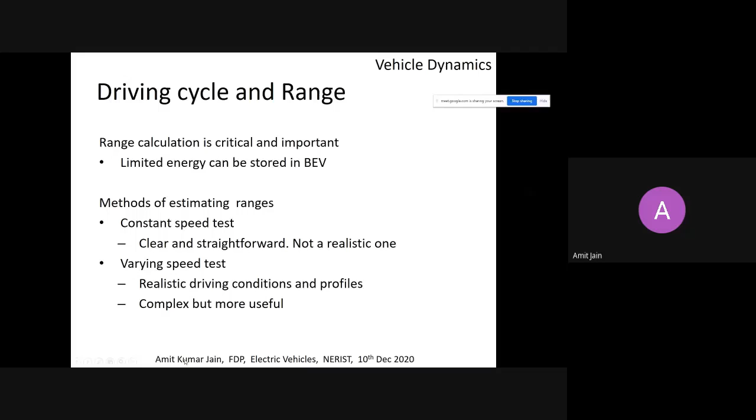Okay, I think there's a lot of noise. I will just come back. Okay, okay, sir. Sorry, all of you. Yeah, it's okay. No problem.

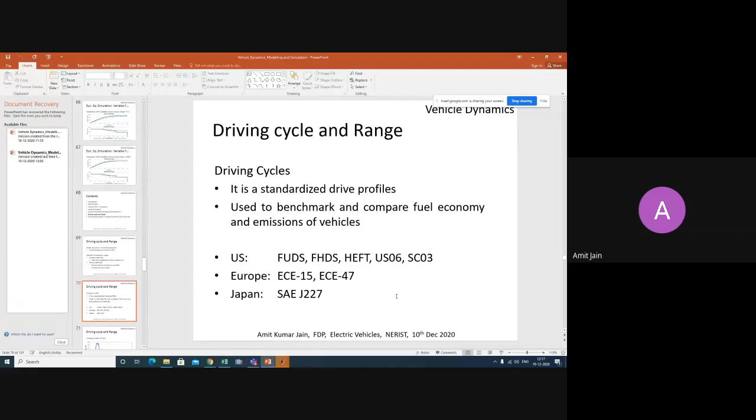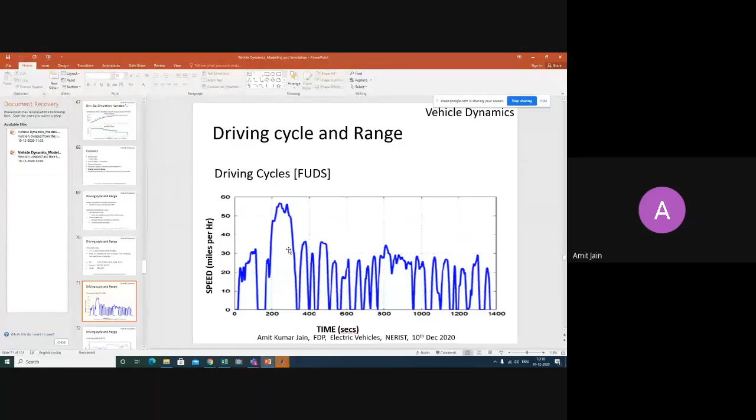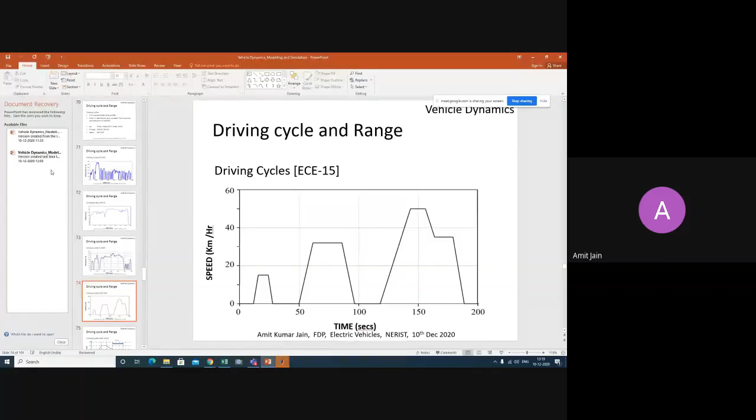This is the European ECE-15. You can see that there is a positive dv/dt, constant speed, negative dv/dt, and these are different. Here it is higher, and these constant speeds are also higher. They might have some kind of data collection, and based on these different dv/dt and different constant speed regions, they can find out what the fuel economy is. This is a nice thing actually. Even during stop and go, we sometimes go to higher torque and higher speed ranges, as we have seen here.

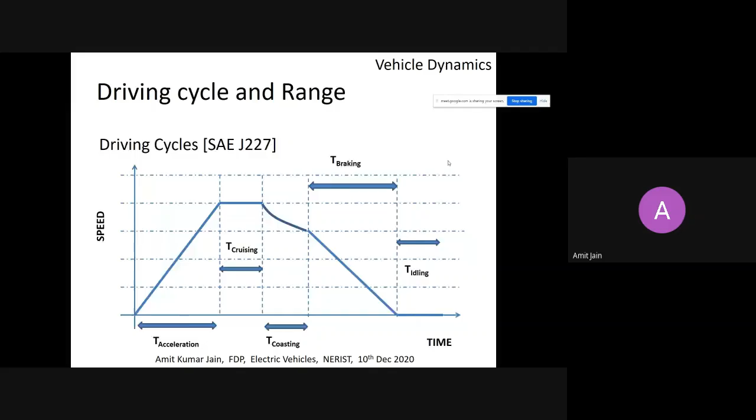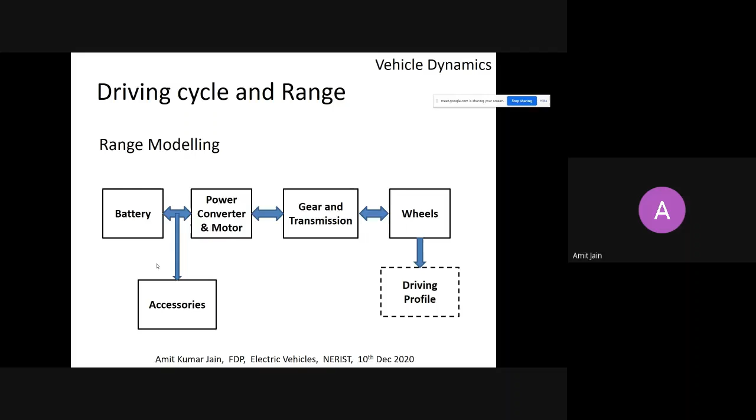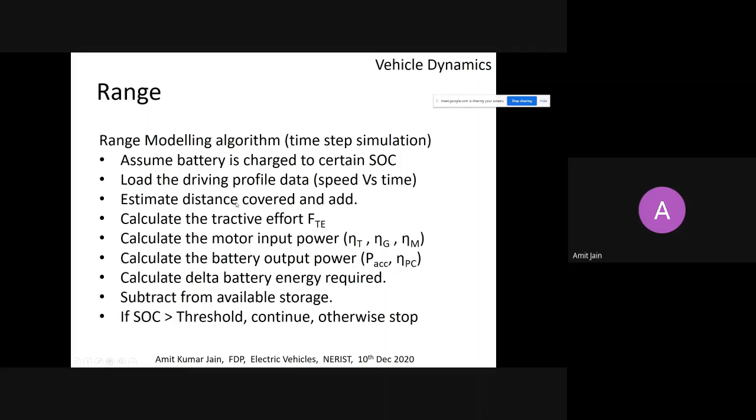So for the driving profile, we will keep running and keep calculating the energy coming out of the battery or going into the battery. When the state of charge of the battery is above the threshold, you continue this. Otherwise, you have to stop, and whatever distance you have moved, that is your range. So this is how it is done.

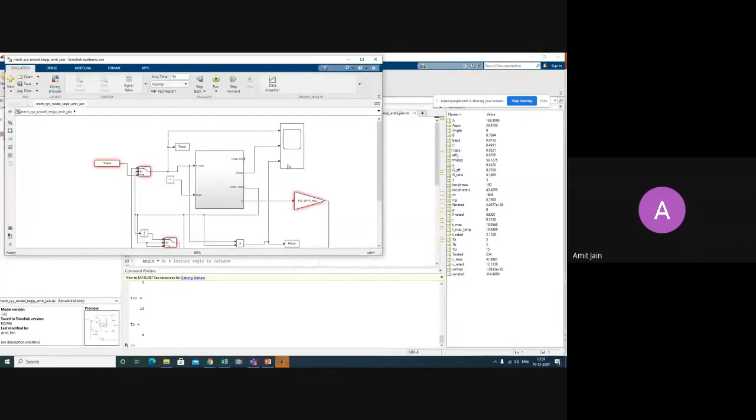So how to put this all in simulation? We have already discussed part of it. Simulink is another platform where we can do a lot of things. Earlier we have seen the M-file approach, but we can also do it in Simulink. A lot of us are quite familiar with Simulink, and it's another way of doing things. It's not command window type.

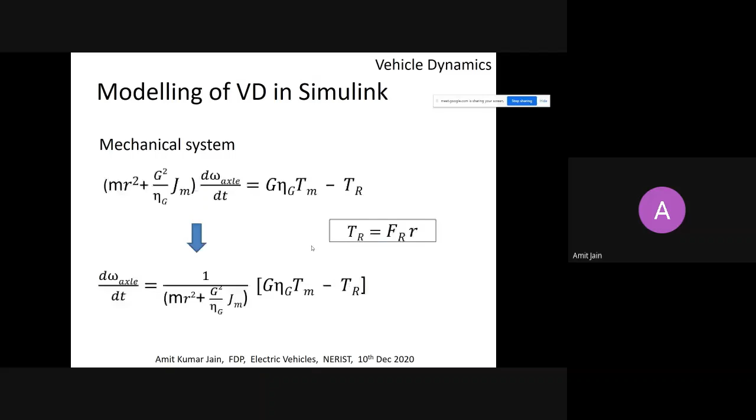And sometimes it's more handy, because if you do big simulations, I'm more comfortable with Simulink, because Simulink has a lot of other machines, power converters, battery models, so they all can be coupled. So if you do this modeling also in Simulink, it will be very handy. We all know this equation. We have to write this equation always in d/dt form, and then in integration form. So this is motor torque, T axle.

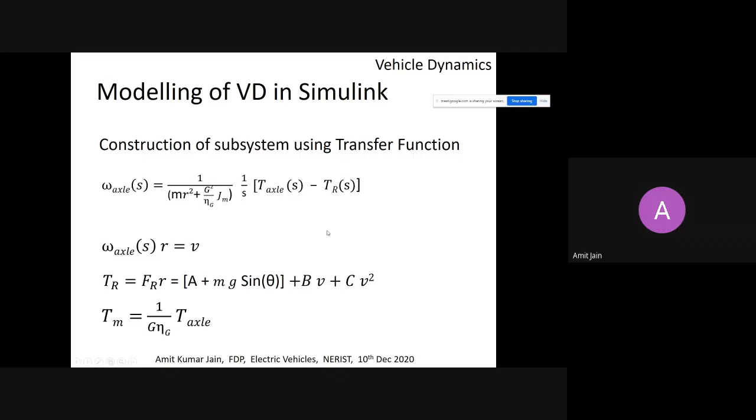We have to write it in terms of Laplace, the s transform. This is easy, the same thing. So this is how to construct this. This is the motor torque given to the block, and let's say you have some system. It has a motoring torque and an opposing torque, and then this is the accelerating torque.

This is the motor torque and this is the opposing torque. The difference of them is the available torque for accelerating. This acceleration torque will give you a certain speed, and this speed is again used for calculating the opposing torques. You can also give the angle, depending on whether you're moving on a slope or not. If theta is 0, the gradient force mg sin theta will be 0, otherwise it is not.

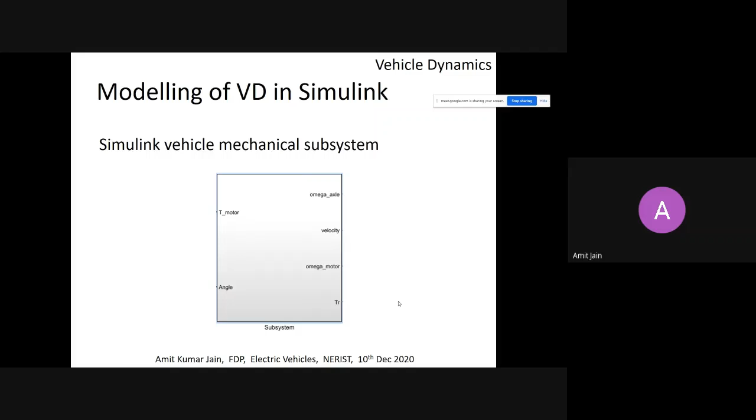So with this, you can make a subsystem where these are the input parameters, and you can even do the performance analysis we have seen. In this block we can also incorporate the constant torque, constant power, and constant speed regions. In the constant torque region, T is constant. In the constant power region, T is inversely proportional to speed. And in the constant speed region, we apply torque that is enough to support the losses. These are all incorporated in this model, so we have moved from the M command window to Simulink.

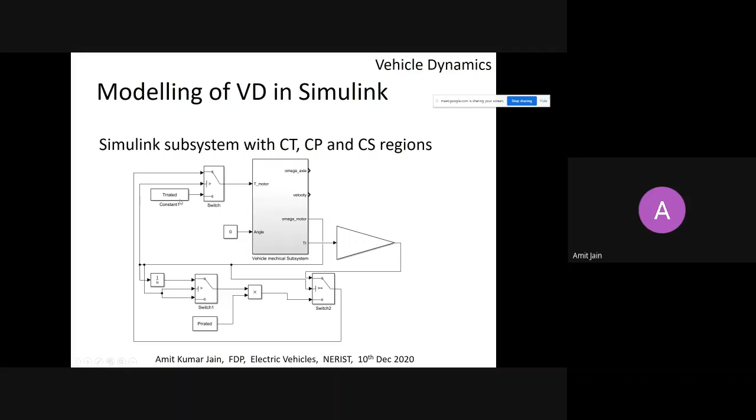Moving from constant torque to constant power all depends on speed. You apply full torque when the speed is under V rated. When the speed reaches rated velocity, you move to torque inversely proportional to speed, so that power remains constant. And when you reach the maximum speed, you only support losses. So these are all speed dependent; speed alone decides these blocks.

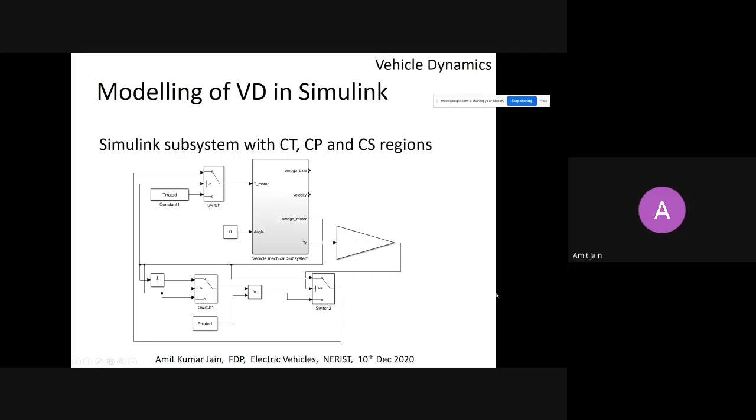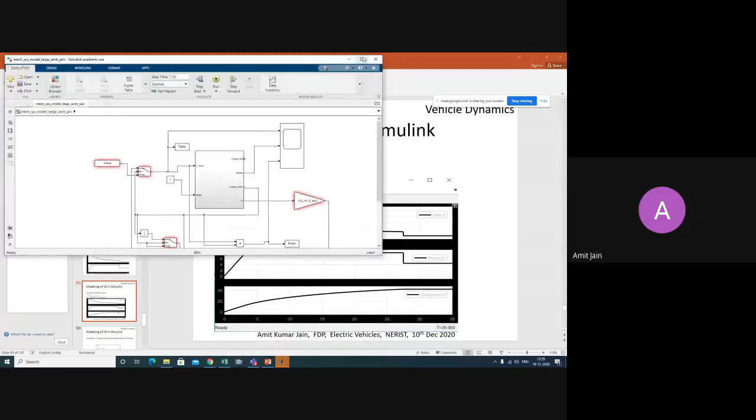This is the simulation of the constant torque and constant power regions. This is the torque curve, and this is the power curve, in kilowatts. In the constant torque region, power increases from 0 to full, and then it remains constant. Then you go to the constant speed region because you don't require any accelerating torque. Speed is also here. Maybe I'll show you in Simulink. So this is what I was showing.

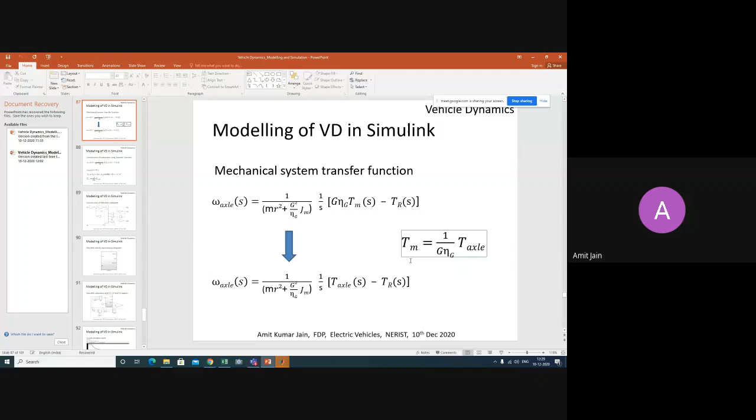So these equations we can always bring down to this. T axle is what is coming from the motor. Having found a suitable gear ratio, TM becomes T axle using the gear ratio and efficiency, and TR is the resistive forces. And these are the ABC constants. If you know A, B, C, you can always write T resistive as a function of speed, and this is what is more generally available.

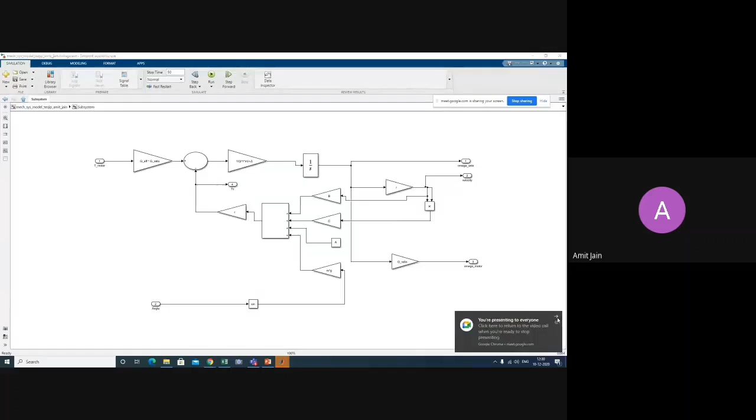So this is an airport route, so you can probably hear the sound of the aeroplanes also. Yes, sir. No problem, sir. Yeah, every 5 minutes an aeroplane passes. The airport is nearby.

So you can appreciate that if you have a simulation where you are running an induction machine or PMSM machine using a power converter, this can be easily clubbed here. That's what I will show you also. That's why moving to Simulink is a good idea. So let me run this.

So basically, this is a 2015 Nissan Leaf EV. The Nissan Leaf data is there. The power rating is 80 kilowatt, torque is 254 Newton meter, maximum speed is 150. And we know the ABC constants of that vehicle.

So if you take a Nissan Leaf or any vehicle, and if you have these parameters with you, you can do all these simulations and find the performance. They might have claimed some performance, but you can calculate it on your own and check it. That's what I mean. So let us run this M file and see. Okay.

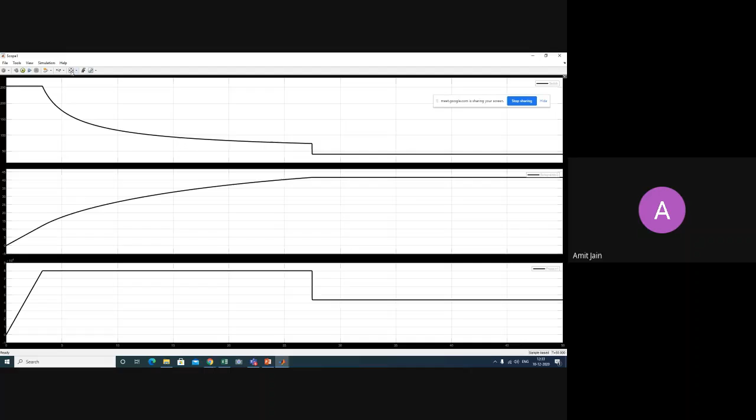Yeah. So whatever I've shown in the slide is coming here. Basically, you can see that it has... I don't know how to do that. How do you invert colors? I'm slightly poor in this, so I hope you can see this axis.

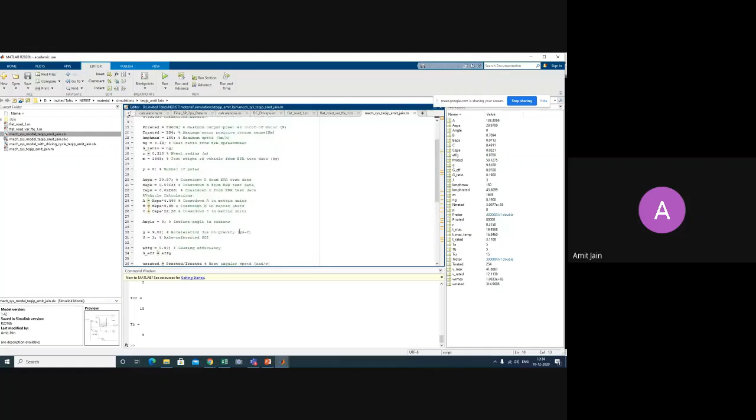So it is taking roughly 27 seconds to reach the maximum speed of this 40 kilometer per hour. And let's say we change some parameter and see: instead of a torque of 250, if you have a bigger machine which has more torque, then what will happen?

So at least in all our research institutions, we can start modeling and simulating. Most of us don't do this, but if our students go to industry and the industry knows that we can do this kind of analysis, it will be beneficial for the students to get jobs and all that.

Yeah, so what has happened, I don't know. Actually, if you increase the torque, it was able to accelerate more, and other things have already been limited. So only the ramping up will be faster. Earlier I don't know how much it was. Now it is almost 2 seconds, even less than 2. Maybe I should have checked it earlier. So now it is 2 seconds.

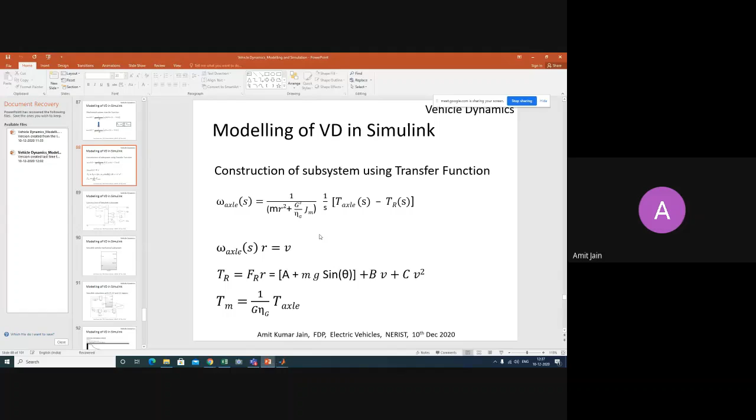Another interesting thing: we were discussing these driving profiles, right? So why can't we do this kind of checking? Put this driving profile in and let us check. That is what I have done later.

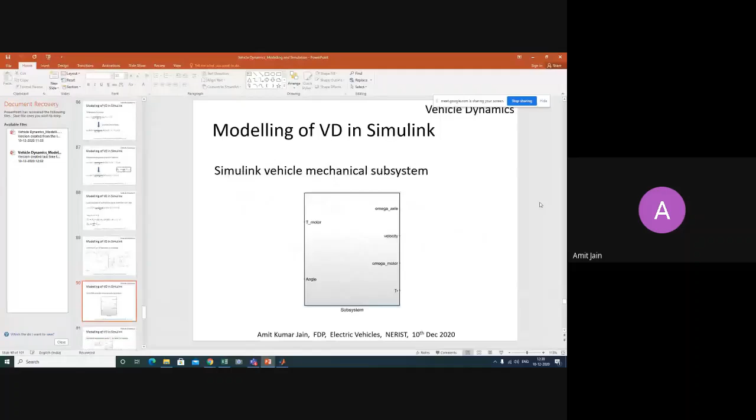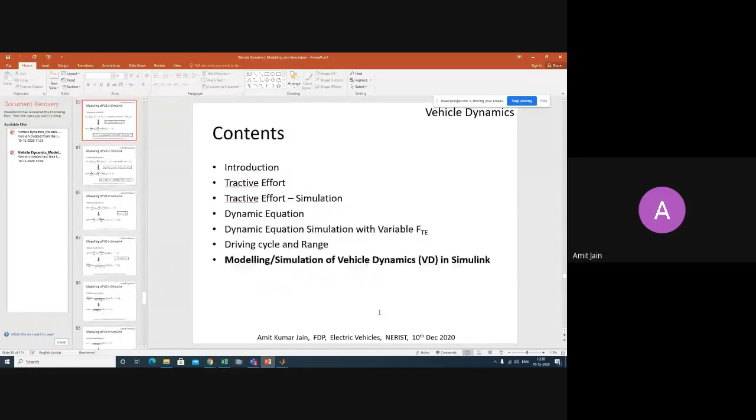There is a block called Signal Builder in Simulink. It is a very interesting block. You can also do it without this, but here some kind of automatic programming is done. Here you can choose these points. This is very similar to the SAE profile I was talking about. I'm missing this here, but the three regions can be easily implemented in this.

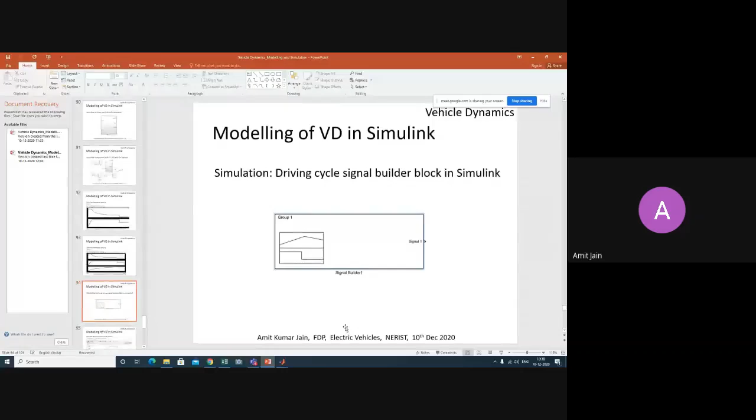So you can vary this point here. Let's say we want 0 to 30 kilometer per hour in 15 seconds. Then you have a constant speed region and then a deceleration region.

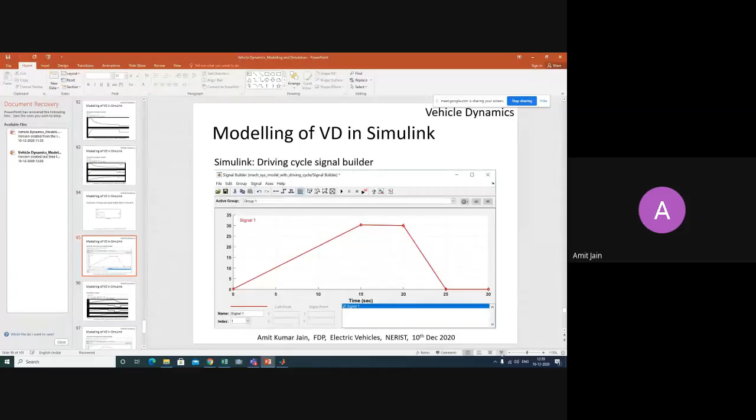Okay. So if you do this, then this is the speed, and actually we have to find out now. So basically, the slightly different thing is like, here we are giving a driving profile, and we have to find out, if we want this performance, then what kind of torque and power rating will be required?

Actually, we are not knowing in advance what is the power and torque rating. Here we are giving this directly, and we are giving velocity and dv/dt. We will find the force required to operate these things, and if you have already decided on gears and all, we can find out what is the motor torque rating and motor speed rating required. So this is a reverse calculation, and that is the actual calculation, basically, you can say that.

So if you want to have this kind of speed, you need to operate. This is a constant torque region. This is constant power region here. Constant speed. So this is torque. This is speed, and this is torque. And here you can see that after this speed, actually you are moving to constant power region.

This is omega max, but this is omega rated. So you are in constant torque region only up to here. But if you want to go above this, you have to go to constant power region. So basically, motor has to be rated for this condition. And you go to constant speed, and constant speed does not require much torque. While you're coming down, since you have already gone above omega rated, you have to go through constant power region initially, and then constant torque, and come back to zero speed.

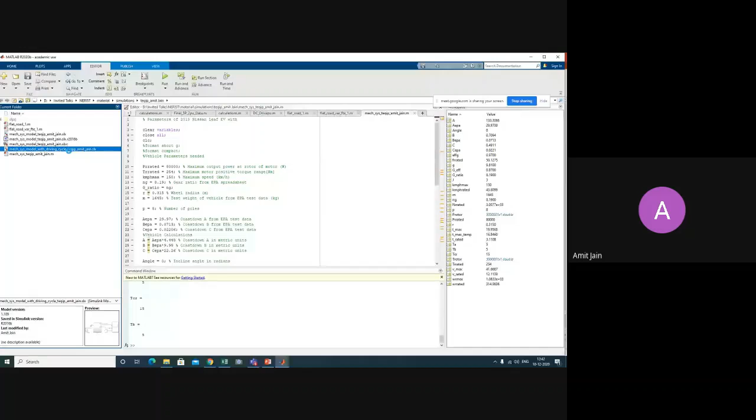It will take some time, so we'll move ahead. So here, we have changed it, so it is 10 acceleration, 10 deceleration, and 5 seconds for constant speed. So here you can see that you have a larger deceleration region compared to the previous one, so you are able to recover more energy compared to the previous one. And it is opposite here. So 5, 10, and 10.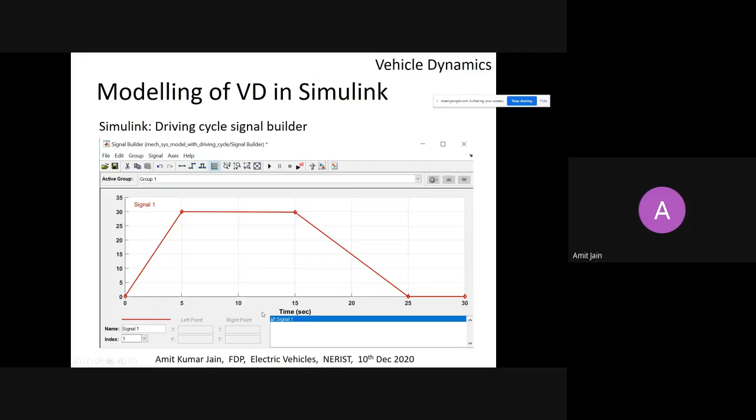So here actually, no. So what happens? Let's say this deceleration region is not in your hand. So basically, how you will do that, it all even depends on. So, this is not in your hand always. But this is important. You can see the variation of energy and the power, so you are having a wider power region compared to this power region. But this is not in your hand always.

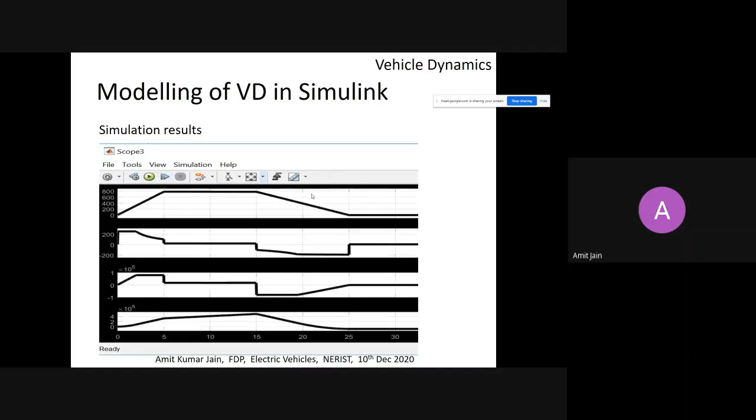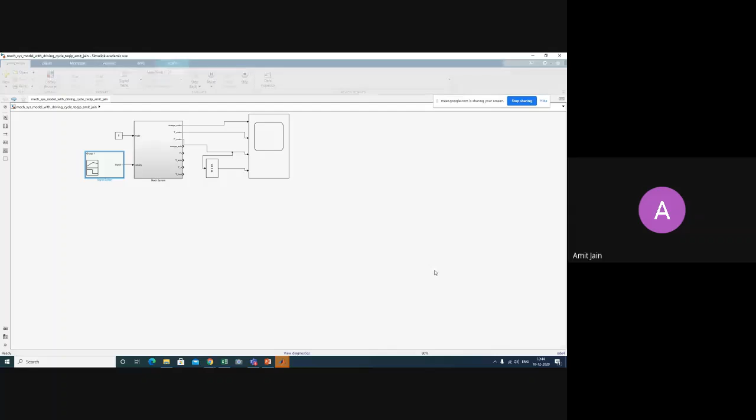So this is the simulation what I was talking about. So this is the mechanical system what we have, with all this embedded, and then this is the signal builder block, so let us see some simulation. Yeah. This first simulation. So this is a velocity profile. We have decided that this is our omega rated.

So this is torque, constant torque region, but this is a torque waveform. You're moving to constant power, then constant speed, then coming back to constant power, constant torque. This is power. This is energy. So we can move these points.

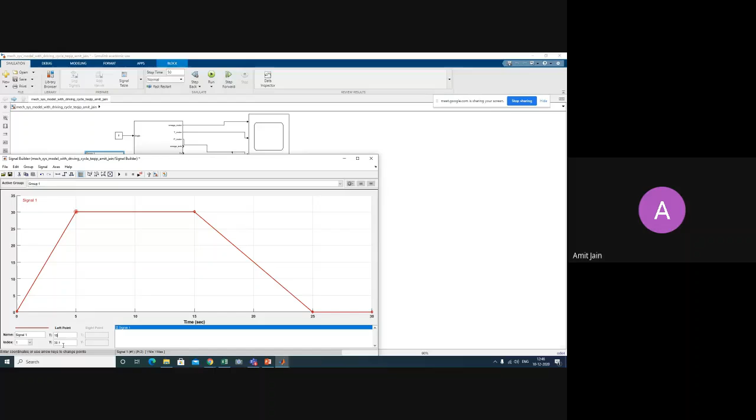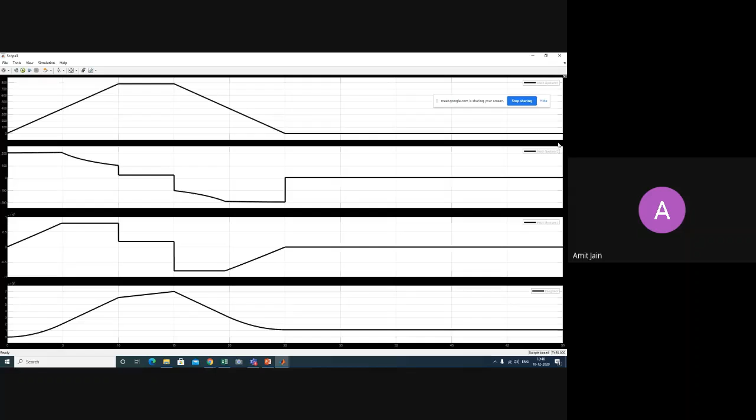So this has changed, and therefore this has also changed. So we can play with this thing. And so actually that is what I have for this session, many things, but acha, again some more things actually I can show you.

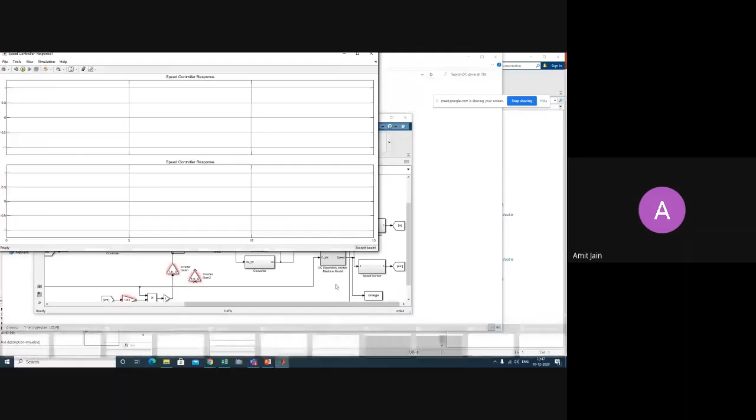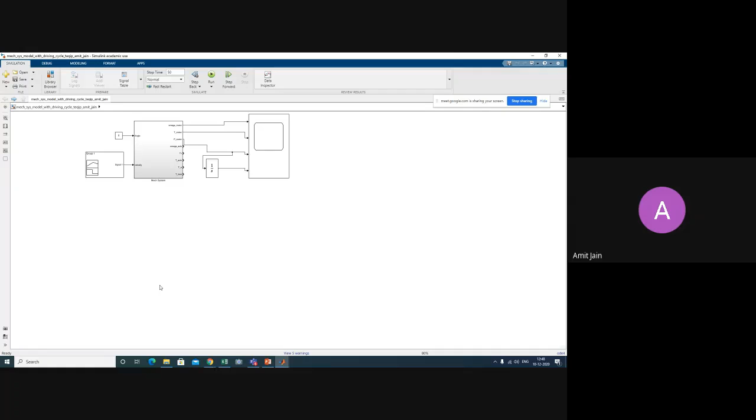So how we incorporate this, you can see in this. Basically, the driving profile is not in our hand, right? The driving profile, let's say, comes from the road condition and where you are driving, but the output of this is torque, and this is our load torque. This torque has to be given by the motor. For delivering this kind of torque-velocity profile, this kind of torque is required, and who will provide this? It has to be provided by the motor.

So actually in our drive simulation, this is a drive simulation of a DC machine. Basically a closed-loop simulation where you do speed control and current control, PI controllers, and here you have a power converter, a DC-DC converter, and this is the model of a separately excited DC machine, right? The armature voltage and the field flux, it can be PMDC. Here we generally require the load torque profile. In the model of a DC machine, you give armature voltage, and load torque has to be given. So where will this load torque come from? What is the load?

So the load can be coupled. This whole block, this T motor, is basically the load to this machine. This machine has to support this load by suitably varying the armature voltage and armature current. So there it completes the whole thing. And this is a power converter, basically the chopper. And this chopper needs the DC voltage, right? So the DC voltage will come from the battery.

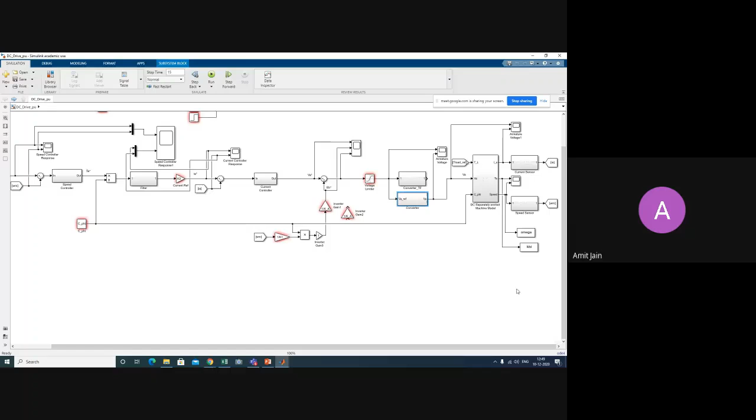So battery, power converter, machine, drives, and this T load will be taken from the driving profile and the vehicle dynamics of the system, the mechanical system. So basically, this is how the simulation is done. You take any battery, power converter, machine, control of the machine, load profile, velocity profile, system dynamics. All these things will be in the same thing, and it's possible to do the whole simulation in Simulink.